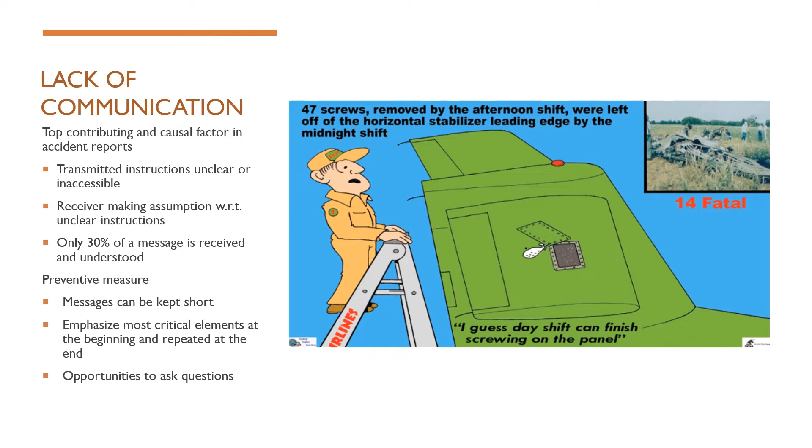Opportunities to ask questions. The culture of open communication and asking questions has to be fostered, and technicians should be encouraged to ask questions. Lack of communication safety nets. Use logbooks, worksheets, etc. to communicate and remove doubts. Clear information with respect to the work undertaken is to be mentioned in logbooks and should clear any ambiguity. Discuss work to be done or completed, conducting briefing and issuing clear written instructions with clear responsibilities of the team members prior to undertaking the major activity.

Never assume anything. Assumptions often lead to things being construed as completed, even if they are not, and often lead to disasters. Use descriptive words, left, right, upper, lower, etc. while describing the details of the task undertaken to avoid ambiguities and further errors. Communication pertaining to the task at hand is also a part of task completion. So, taking the responsibility of communication is also important.

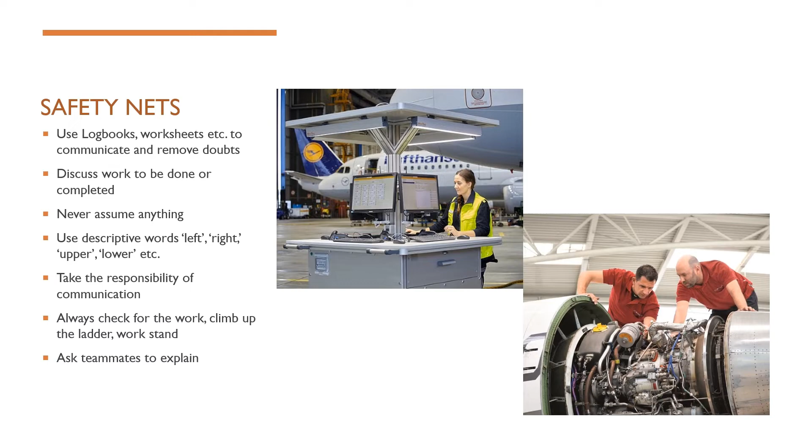Always check the work, climb up the ladder, work stand. Take pride in supervising your own job, and one is being taken over. Be vigilant. Nothing stops you from going to the colleague working on the aircraft and assisting or supervising him. Don't sign unless you cross check it. Ask teammates to explain. Asking critical questions pertaining to the task being undertaken is the key to avoid errors and extract more information essential for efficient task completion.

Complacency is caused due to lack of stress. We all need some amount of stress to complete work in an efficient manner. Too much or too little stress leads to fixation or boredom respectively. Complacency can be described as a feeling of self-satisfaction accompanied by a loss of awareness of potential dangers.

With lack of resources when operating on detachment, the loadmaster, when being asked by the pilot to check the battery door status, in the haste of completion got out of the aircraft and walked through the propeller, killing himself. The loadmaster was used to going around the aircraft during his routine maintenance tasks and had become complacent about the working environment, which is dynamic and challenging.

There is inherent danger in the activities being undertaken in aviation. The personnel become habitual to the activities and start considering them to be safe. Existence of moderate stress is essentially required to ensure efficient and safe aviation maintenance operations. Always expect to find a fault. Being vigilant and having an eye for the details can be of immense help to mitigate avoidable errors.

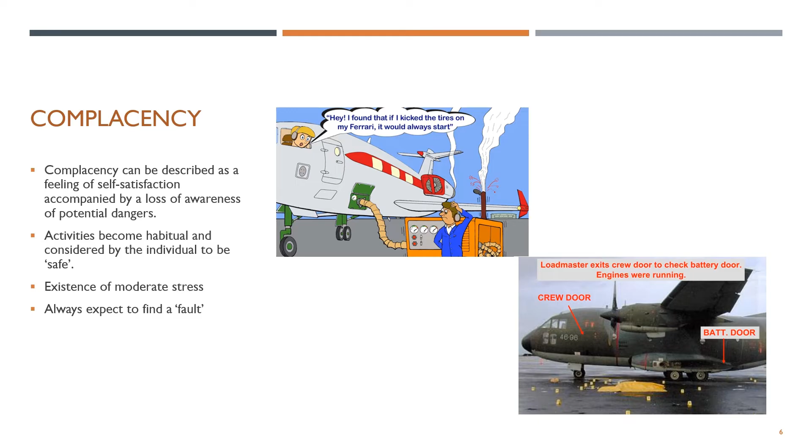Complacency safety nets. Following written instructions, adhering to procedures which increase vigilance. Having a culture that respects following aircraft maintenance manuals, aircraft documentation, and having an eye for the details is the key to prevent complacency setting in. Avoid working from memory. Human memory is fallible, and the importance of following the updated maintenance manuals cannot be ignored at any point in time. Teamwork and mutual cross-checking. Always check the work being taken over and refer to the documents before starting the work.

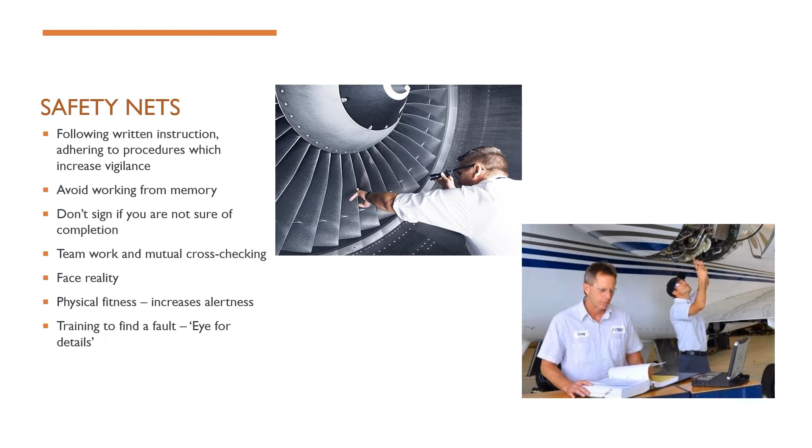Face reality. Let's all understand that aviation is complex and consistently evolving. So we all are duty bound to adhere to the basic tenets of aviation maintenance. Physical fitness increases alertness. It's a well established fact that a physically fit person has more situational awareness. Training to find a fault, eye for details. Fostering the culture of critical observation and thinking is important amongst the maintainers and supervisors.

Lack of knowledge. Lack of knowledge is not inexperience. Aviation is complex and consistently evolving. One needs to be abreast of the technological developments, changes in procedures, and amendments in maintenance manuals. Knowledge of latest tools and changes in part configuration is important for efficient maintenance. Task completion requires substantial technical training, current relevant experience, and adequate reference documents.

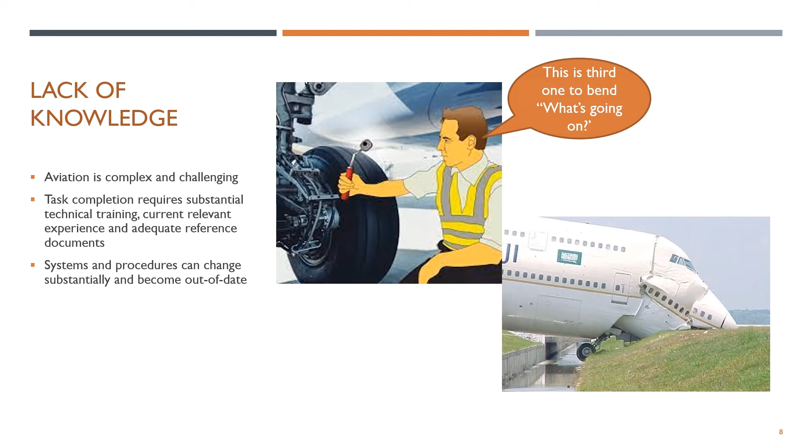The aircraft in the picture is a Boeing 747 operated by Saudi Airlines. While being taxied, the crew used engines number 1 and 4 to save fuel. Very soon, the brake accumulators lost pressure, as the hydraulic systems are powered by engines 2 and 3, and the aircraft ended up entering the drainage for monsoon waters, causing heavy damage to the nose section. Systems and procedures can change substantially and become out of date. So, we have to consistently upgrade our knowledge by continuous learning.

Safety nets, lack of knowledge. Continuous professional development. The organizations can implement continuous learning programs besides creating a culture of knowledge management. Sharing the knowledge with colleagues. Discussing routine operations with colleagues and sharing experience definitely aids the improvement of the knowledge of individuals. Knowledge on human errors. Being aware of the fact that accidents don't happen in isolation and they are caused by a series of lapses at various supervisory levels. The classic Swiss cheese model to be understood and used to avoid lapses. Stay current, read, read, read.

Use up-to-date manuals. OEMs often issue amendments to the maintenance manuals and procedures. Using the updated instructions and spares goes without saying in aviation. Ask for help from professional technical representatives. In case of doubts, raise the level and ask the professional for help. Clear the doubts, especially when undertaking the task for the first time. Training to find a fault, eye for details. We are all human beings and will make mistakes. Following the written procedure is quite essential. Communicate. Let someone know when you need help.

Distraction. Anything that draws a person's attention away from the task. Our jobs and lives are full of distractions, and they have become part of our culture. It makes us lose concentration on the task at hand and may lead us to commit mistakes due to forgetting a few steps. Distractions can be avoidable and non-avoidable. The general distractions are people, messages, phone calls, and work requests, to name a few.

The aircraft maintainer was connecting the fuel line of the right engine when he was called for assistance by a fellow co-mechanic, and he hand tightened the fuel line. He forgot to complete the tightening of the fuel line and completed the said task.

Later on, during the third sortie, the aircraft's right engine burst into flames and subsequently crashed, leading to 8 fatalities. Distractions are part of our lives, as earlier stated. However, we need to accept them and find ways to cope with them.

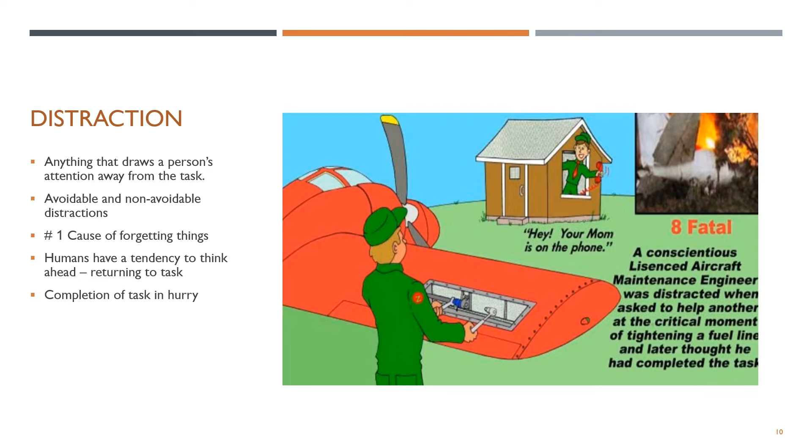Distraction is the number one cause of forgetting things. Humans have a tendency to think ahead. When returning to the task, we think ahead as if the next steps have been completed and start working accordingly, thus sometimes forgetting important steps. We all have an urge to attend to distractions, which are unavoidable and may cause us to hurry in completing the task, thus missing some of the important steps.

Distraction safety nets. Good workspace design. Management of environment. Designing the workspace with adequate lighting and environmental conditions, with more ergonomic tools and GSEs to hinder less into the physical comfort zone of maintainers. Always finish the job or unfasten the connection. The task at hand has to be completed in totality or has to be disconnected before leaving the aircraft or the section of the aircraft.

Mark the incomplete work. It's of utmost importance to mark the incomplete work, as we all tend to forget at what point we have left the work. Usage of lock wire or torque seal. Locking wire and torque seal are to be used to differentiate the completed work from incomplete work. Double inspect by another and self. Always double check the completion of your task and, if required, ask another technician for help. Supervisory and independent checks play a key role in this case.

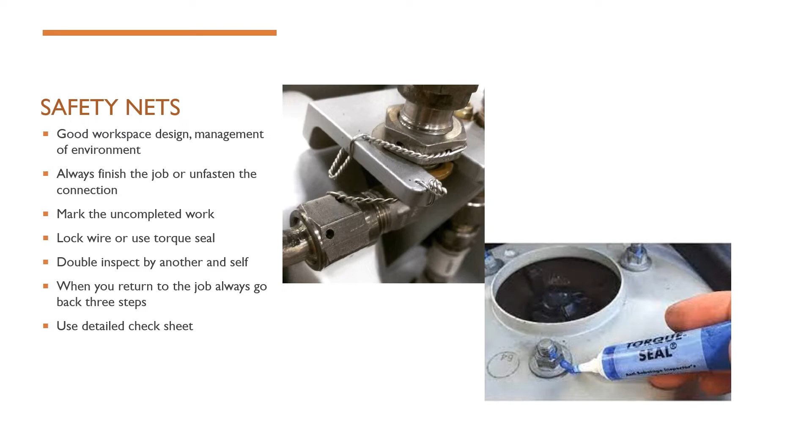When you return to the job, always go back 3 steps. When returning to the job, start the work from 3 steps earlier to avoid missing important steps in task completion. Use detailed check sheets. Check-off lists and following the maintenance procedures in totality is the key.

Lack of teamwork. Aviation is a team business. We all depend on our teammates for successful completion of tasks. There has to be absolute synergy amongst the members of the team to successfully complete the tasks. Non-contributors can lead to unsafe acts. Essential skills for teamwork are leadership, communication, and motivation. A leader with motivated maintainers with effective communication channels and skills can overcome the challenges posed in terms of teamwork.

Lack of teamwork safety nets. A clearly defined and maintained aim. Definition of the steps and milestones in achievement of the task is essential to complete quality aircraft production in time. Each team member's roles and responsibilities. Teamwork is a chain wherein every link has to play its role. Communication messages and methods. Setting channels and protocols of communication between team members is essential.

Limitations and boundaries. As team members, we all should know about the strengths and weaknesses of the team members and pitch in when required and cross-check. Emergency procedures. The team should be well aware of the emergency procedures if the need arises. Individual expectations and concerns. There are human concerns in terms of ego, emotions, and achievements which we all should be aware of and consider while working as a team.

What defines a successful outcome? The successful completion of the maintenance operation has to be clearly defined in terms of ground run, check test flight, and the parameters to be achieved. Debriefing arrangements. Debriefing is essential for discussing the learnings during the completion of the task, to improve the procedure and mitigate the bottlenecks.

Team dismissal arrangements. The team members may often disperse after completion of the task. However, there has to be a mechanism to retain the knowledge gained during the task or project. Opportunities for questions and clarifications. Concerns of all team members have to be addressed in a positive manner.

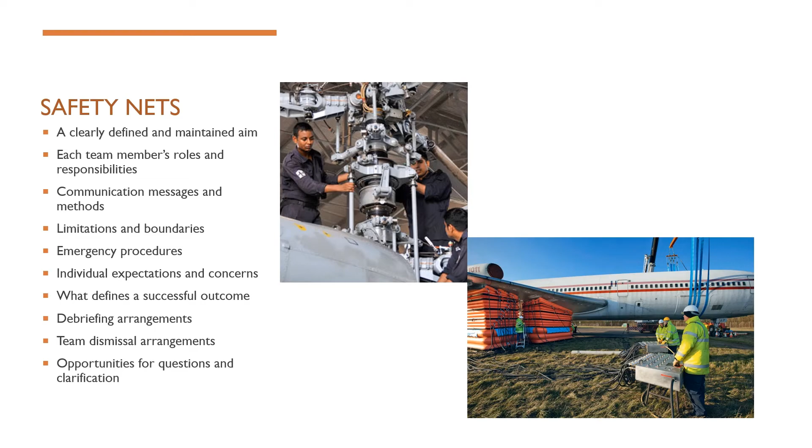Fatigue. Fatigue is a common phenomenon in aviation mechanics, as most of them work 10 to 12 hours a day. It reduces the capacity of the human being to work efficiently. Fatigue is a natural physiological reaction to prolonged physical and/or mental stress which affects the ability to concentrate, remember and make decisions. Fatigue often leads to distraction and loss of situational awareness.

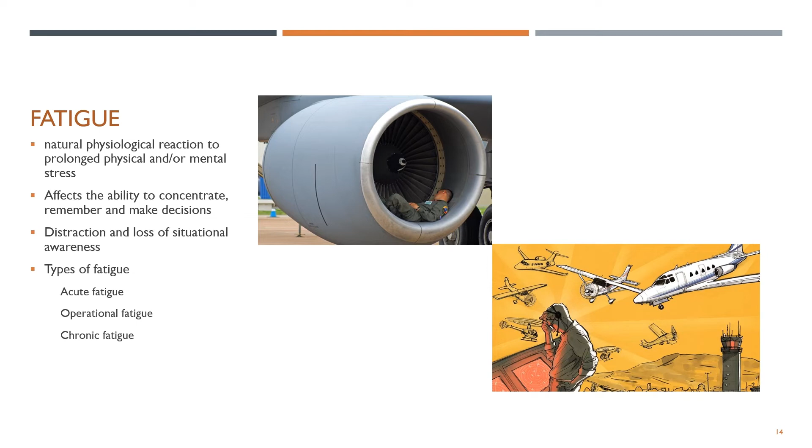Types of fatigue. Acute fatigue, caused by prolonged hours and insufficient sleep. Operational fatigue. The body and brain get fatigued due to prolonged task performance requiring hand-eye coordination. Chronic fatigue. Chronic fatigue is the combination of mental stress and physiological conditions such as anemia and has long-lasting effects on the body. Symptoms of fatigue. Reduced attention, diminished memory. Mood becomes withdrawn, low situational awareness, high intensity stress.

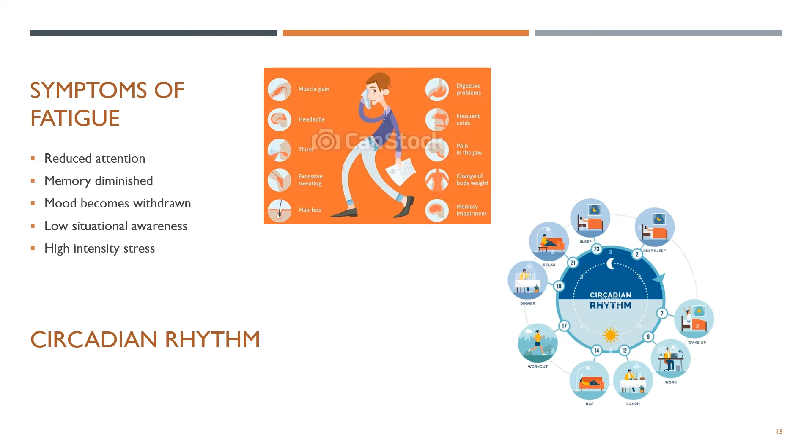The study of fatigue takes us to understanding the important schedule of the human body called circadian rhythm. The human body's best time to work is from 9 am to 5 pm, and it requires deep sleep from 1 am to 4 am. We should avoid any maintenance related activities during this time, as the reflexes of the body and ability to think are drastically affected during this time.

Fatigue safety nets. Be aware of the signs and symptoms of fatigue and look for them in yourself and others. Fatigue self-management: adequate sleep, healthy diet, reduced use of alcohol, and exercise are the best ways to cope with stress.

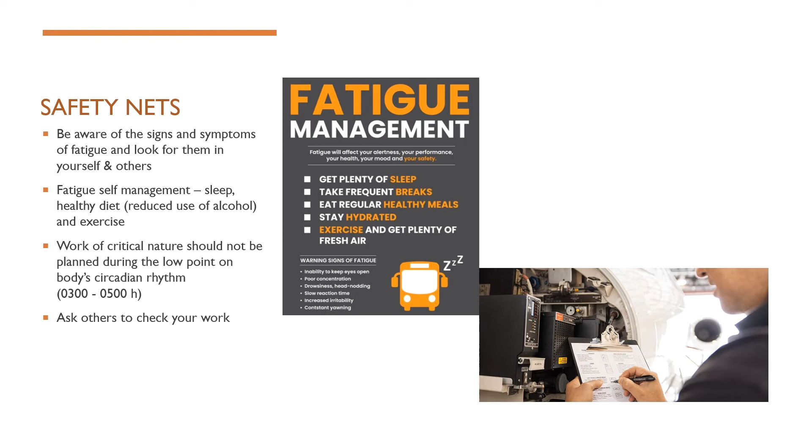Work of critical nature should not be planned during the low point on the body's circadian rhythm, that is 3 am to 5 am. Ask others to check your work. It is possible that we may miss some steps or complete the task improperly due to fatigue. It's always advisable to get your work checked by a fellow technician or supervisor.

Lack of resources. We, as maintainers, often face lack of resources in terms of spares, time, tools, manpower, and ground support equipment, to name a few. Availability of the parts is important as it builds additional pressure on technicians. The lack of resources often leads to usage of inappropriate tools and spares in the name of finding the way out or creativity, which is incorrect of course. We have to be sure about the quality of the resources available at our disposal, including the support.

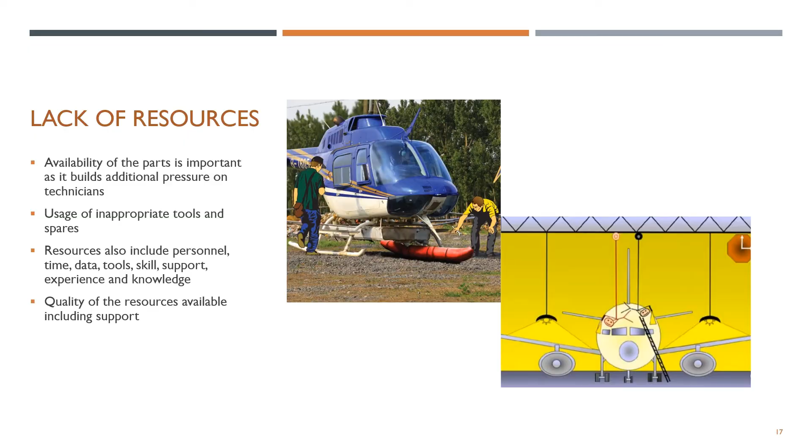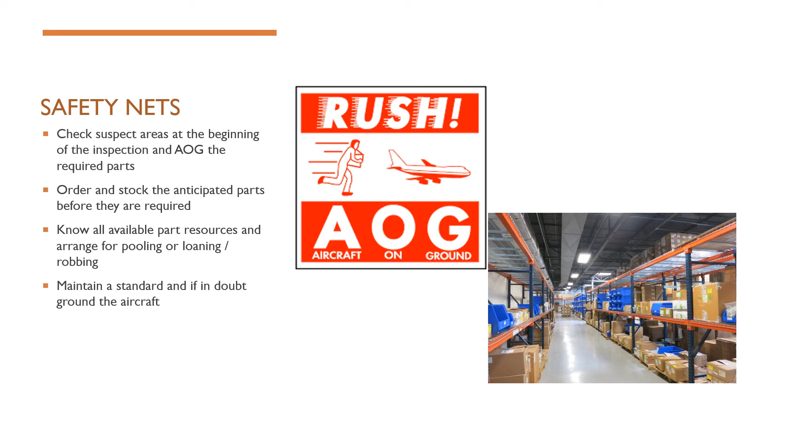Lack of resources safety nets. Check suspect areas at the beginning of the inspection and AOG the required parts. Prepare the list of mandatory spares well before the scheduled inspection and demand them in time to avoid delays and thereby undue pressure. Order and stock the anticipated parts before they are required. Know all available part resources and arrange for loaning or pooling. Maintain a standard and if in doubt, ground the aircraft.

Pressure. Certain pressure is required for efficient task execution. However, too much pressure can lead humans to make errors. One perpetual pressure in aviation is to produce. This may lead the maintainer to cut corners and take steps which are dangerous: completing the work despite lack of resources, signing without completing the work. Pressure to complete work and pressure to go home are also the fallout of pressure.

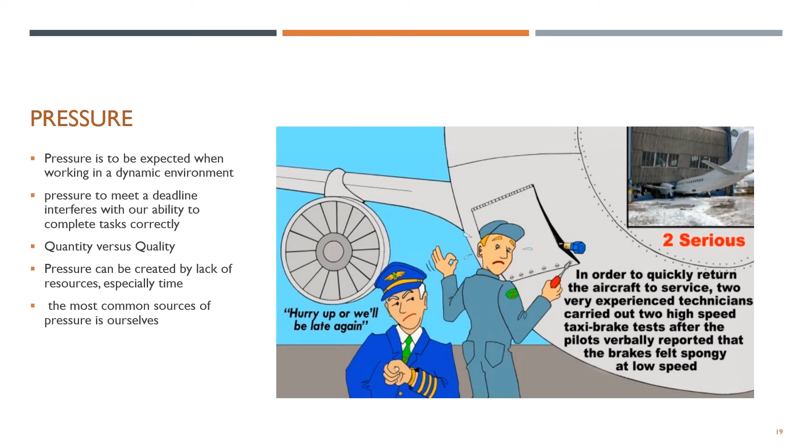Pressure is to be expected when working in a dynamic environment. Pressure to meet deadlines interferes with our ability to complete tasks correctly. The pressure to produce in time with the paucity of resources leads to the old argument, quantity versus quality. Pressure can be created by lack of resources, especially time. The most common source of pressure is ourselves. We as technicians have an inherent tendency to complete the job despite all challenges and get the aircraft online.

Pressure safety nets. Be sure that pressure is not self-induced. Don't build up the pressure on yourself that it's incumbent on you to get the aircraft serviceable. If it's not feasible within available resources and time, communicate your concern. Bring out limitations which are stressing you to meet the deadline and quality of the work. Ask for extra help. Raise the alarm for extra resources for task completion well within the time to avoid building up stress. Be assertive or learn how to say no or stop. Learn to draw a line and never cross it in case of flight safety and maintenance safety.

Lack of assertiveness. Assertiveness is a communication and behavioral style that allows us to express feelings, opinions, concerns, beliefs, and needs in a positive and productive manner, not to be confused with aggression. The graph of aggression versus performance depicts that the right amount of aggression, which is termed as assertion, is required to meet the objectives of both parties. However, too much concern for others' rights often leads to compromises and in turn to errors, followed by mishaps. On the other hand, too much aggression leads to arguments and hampers the task, besides affecting human relations and organization environment. Unassertive team members can be forced to go with the majority decision, even when they believe that it's wrong and dangerous to do so.

We can see that in one of the incidents in the United States. A seaplane, whilst undergoing scheduled maintenance, was not complied with the mandatory rudder cable replacement. The lack of assertion to raise the concern and refusal to ground the aircraft if the cable was not replaced led to the subsequent accident, leading to 3 fatalities.

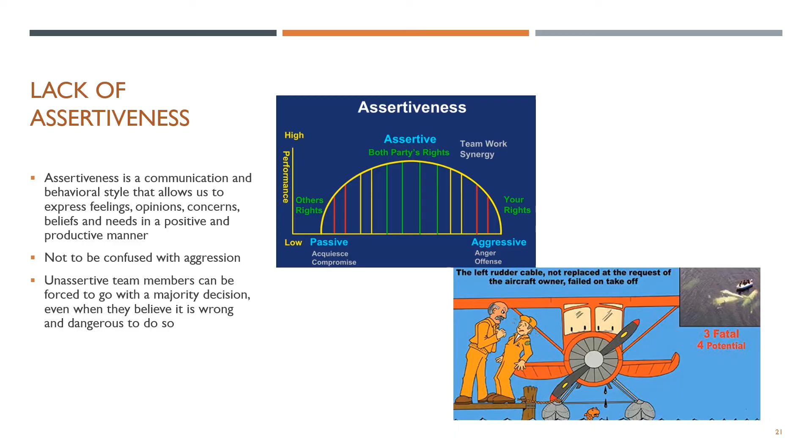Lack of assertiveness safety nets. If it's not critical, record it or bring it to the notice of the officer and discuss it proactively. Discuss the matters which concern you and you think can harm safety in any way. Criticism should be directed at actions and their consequences rather than people and their personalities. Be objective in the criticism and avoid relating it to personalities and individuals. Refuse to compromise your standards. Quality of the work is the hallmark of a hardened aviation technician, and one should not lower it at any cost.

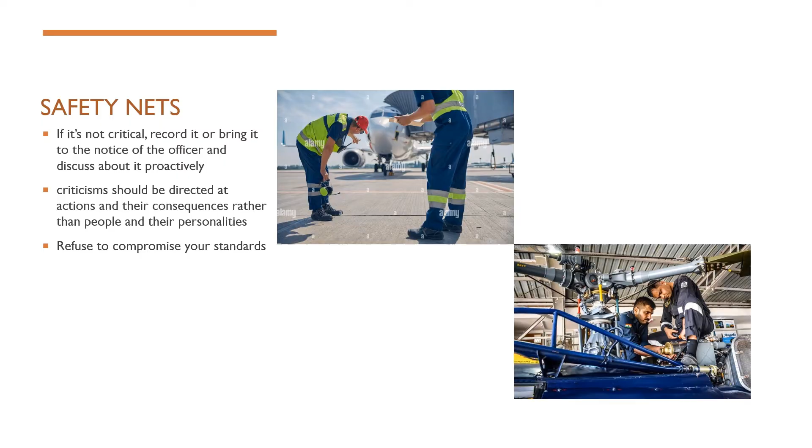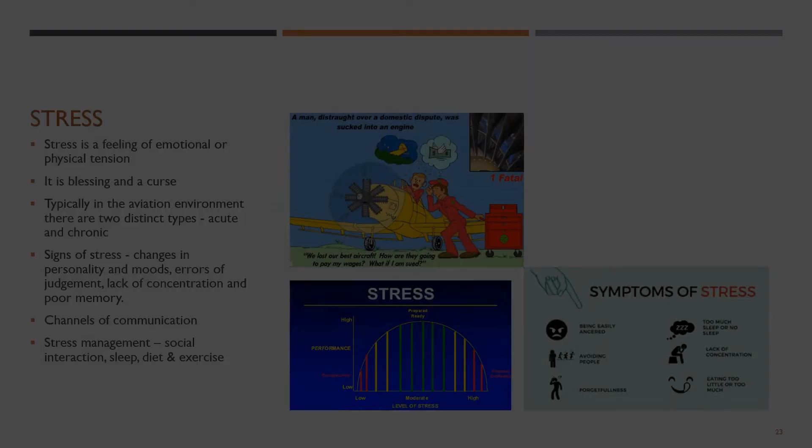Channels of communication: it is essential to communicate about the stresses which are troubling the individual, and if required, professional help be sought as well. Stress management: social interaction, sleep, diet, and exercise are the common stress relievers. Stress safety nets. Beware how stress can affect your work.

Stress affects the decision making capability of a person and may lead to hasty and irrational decisions. Stop and look at the problem rationally. We often look at the problem in isolation and as an impediment and stop thinking about it rationally. Every problem has a solution. We need to look for the solutions rather than getting worked up about it. Determine the rational course of action and follow it to get it resolved.

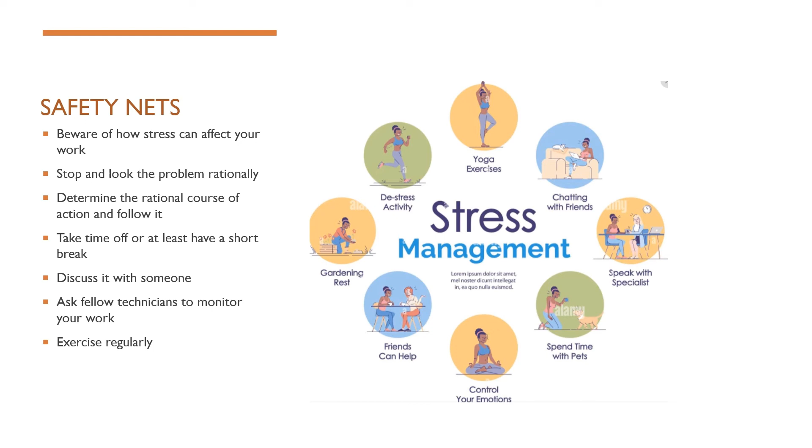Take time off or at least have a short break. Sometimes taking a break from the routine is a great stress reliever and should be practiced to calm our minds. Discuss it with someone or ask for professional help in case of chronic stress. Ask fellow technicians to monitor your work if you are feeling stressed. Exercise regularly. Physical activity helps in reducing the stress. The common saying, healthy mind stays in healthy body, works great to reduce the stress.

Lack of awareness. Lack of awareness is because of one or more human factors and actions, such as fatigue, distraction, or lack of communication. Consider the crew making a simple mistake caused by lack of awareness, wherein they just followed the generic guideline mentioned in the air publication, installed where it is easily accessible, and fitted exactly on the bulkhead located in front of the passenger chair. Whilst braking on the landing roll, a passenger was injured. Lack of awareness often leads to failure to recognize the situation, understand what it is, and predict the possible results.

Tunnel vision. Working in isolation and considering one's own responsibilities. One has to be aware of the consequences of the work he is undertaking and how it is affecting the follow-on or parallel maintenance activities. Building experience with time and understanding one's place in the spectrum of operations. Developing foresight and understanding how one's work affects others' actions. Attitude of professionalism. Constant questioning.

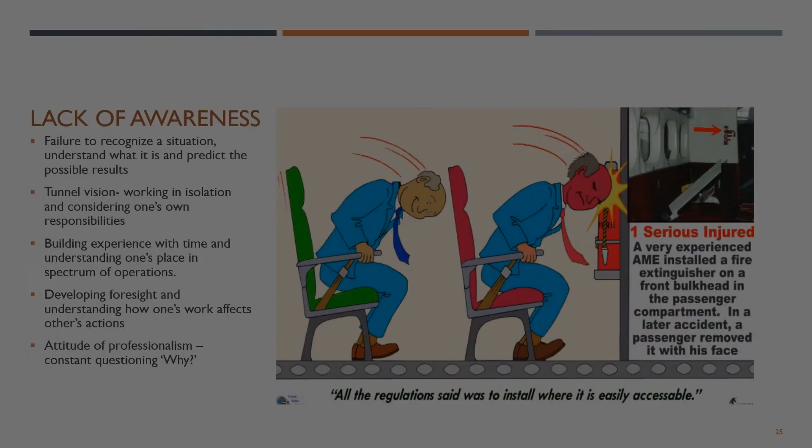Why? Lack of awareness, safety nets. Think what may occur in case of an accident. Critical thinking about the consequences of the improper completion of the task. Check to see if your work will conflict with an existing modification or repair. Ask others if they can see a problem with the work done. Having a third person's view often helps in finding problems which we fail to notice while working.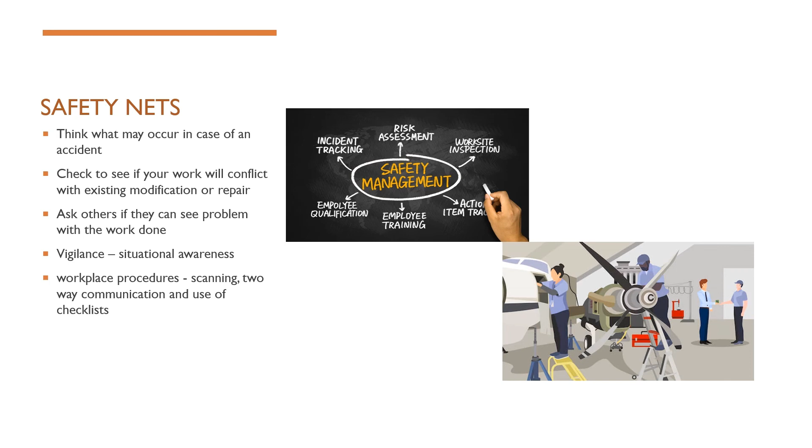Vigilance. Situational awareness is the subset of a vigilant mind and critical thinking. Setting up the right workplace procedures, scanning, two-way communication, and use of checklists. Workplace practices developed over time through experience and often under influence of a specific workplace culture can be good, bad, safe or unsafe. The way we do things around here, unwritten rules or behavior, which deviate from required rules, procedures, and instructions.

May 25, 1979, an American Airlines DC-10 crashed post-takeoff after losing its left engine. Investigations revealed improper maintenance procedure was to be blamed, as the engine was dislodged from the pylon due to incorrect fitment procedure. The crew used a forklift to lift or rest the engine while it was being fitted. The forklift ran out of fuel during the procedure, putting stress onto the pylon bolt and receptacle hinge, leading to the development of a crack which later propagated and caused the mishap, leading to 271 fatalities including crew.

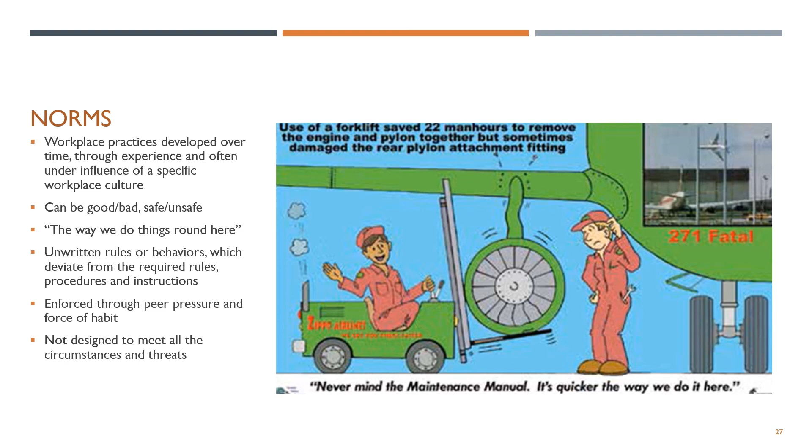Enforced through peer pressure and force of habit. It is important to foster the culture of constructive criticism and norms to follow the right maintenance procedures, not designed to meet all the circumstances and threats. Norms, safety nets. Always work as per maintenance procedures or have the instructions changed. It might happen that the prescribed procedure may be lengthy and requires a workaround. Instead, the crew locally develops the alternative method, which is easy but not as per the book.

In this case, the crew has to get the developed method either established or follow the servicing instructions in totality. Beware that norms don't make things right. It takes courage to stand against the group and point out that norms don't make the procedure right. The little pain taken today will certainly save lives and material in the times to come.

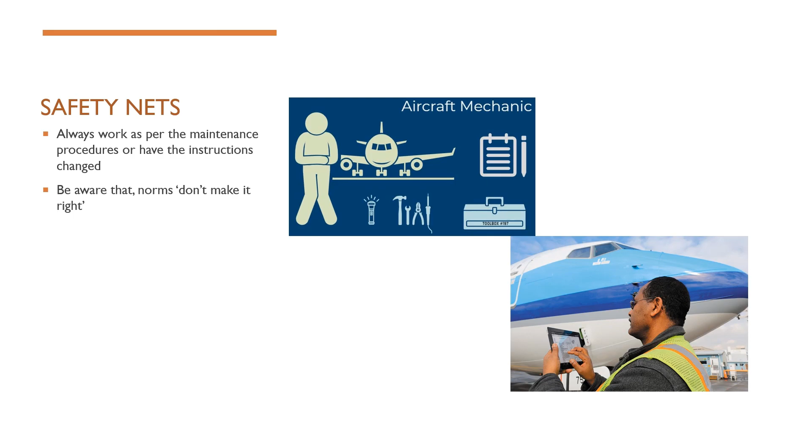To sum it up, the Dirty Dozen is a catchy title, but these are not the only 12 issues faced by the maintainers; it is to instigate the discussion on the human aspects and establish checks and balances to mitigate accidents or incidents. There are other factors such as anger, pride, fear, drugs, and alcohol. Errors are part of life, but we have to get them reduced to the level wherein their effect is not significant. The reality is that aviation is a complex and challenging field, wherein the smallest of mistakes can lead to serious damage to life and property.